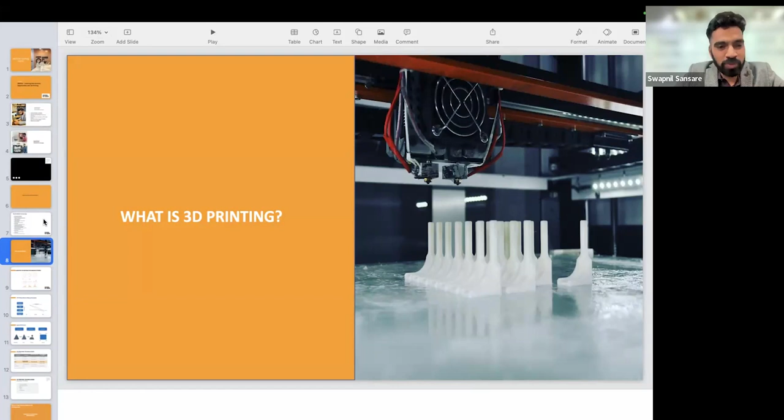So you all know what 3D printing is, I'm not going to go there. If you still want to know, you can quickly go to YouTube or Google and check that out. But however, 3D printing is a layer by layer process where you can add layers according to your part geometry, one layer at a time, and it can actually build a component.

So typically in manufacturing, you have three methods. One is your additive manufacturing, or 3D printing as we call it. Subtractive, wherein you have, say, a block of wood or metal, you machine it down and make your shape - so this is the component you want to make. And third is your formative manufacturing, also known as injection molding or molding, wherein you have a mold and then you pour in a material and form the shape.

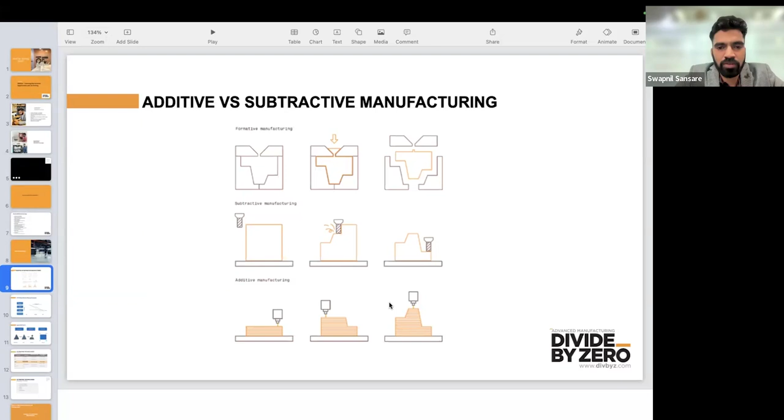So after that, the cost starts reducing because your initial cost is very, very high for the mold or for the tooling. Parallelly, when you look at subtractive or CNC machining also, for 1 or 2 parts, again your tooling cost is high, right? But with 3D printing, even if it's 1 component, 10 components, or 100 components, the cost remains the same. It doesn't change much.

Now, what happens is between, say, 0 or 1 to a few hundred components, 3D printing still has advantage over CNC machining and injection molding, especially when components are complex and have undercuts.

Okay, I definitely think many of you might have your own set of questions here in terms of how it works and how this is feasible. So that part is very important.

So typical AM process is your pre-processing, 3D printing, and post-processing. You all know this. However, there are different technologies - you have metal 3D printing, you have SLS, you have FDM, you have AFPM, which is one of our technologies that we have developed, similar to FFF, but it's an add-on.

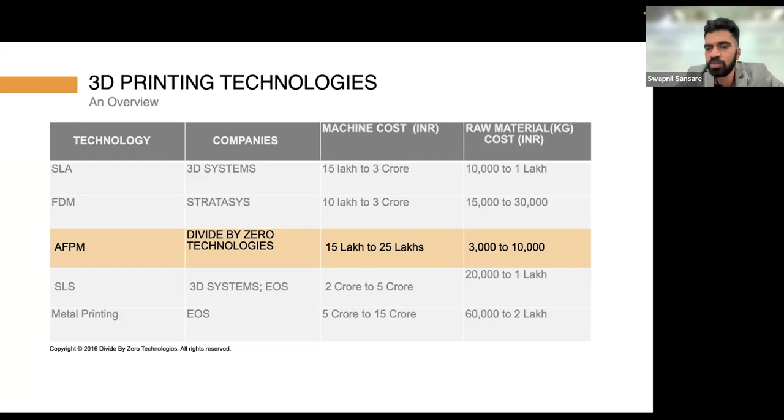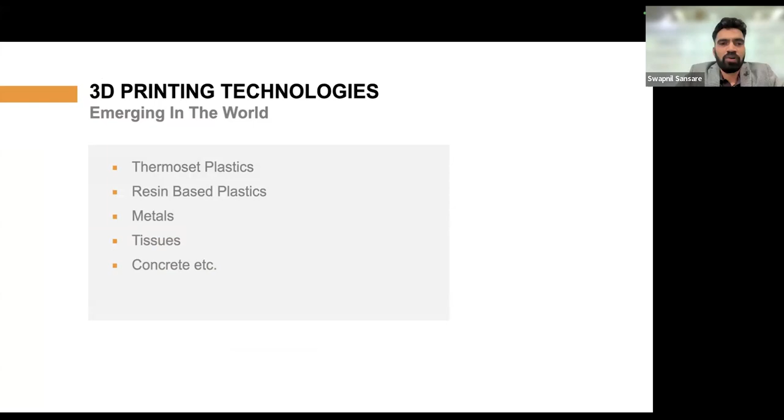And the cost ranges right from, say, maybe 50,000, 20,000 rupees, 15,000 rupees to, I think, a few crore rupees, and beyond that. There is this whole gamut of concrete 3D printing, tissue 3D printing, metal 3D printing, resin, or maybe plastics, polymers. Okay, and typically we're going to talk about polymer 3D printing right now.

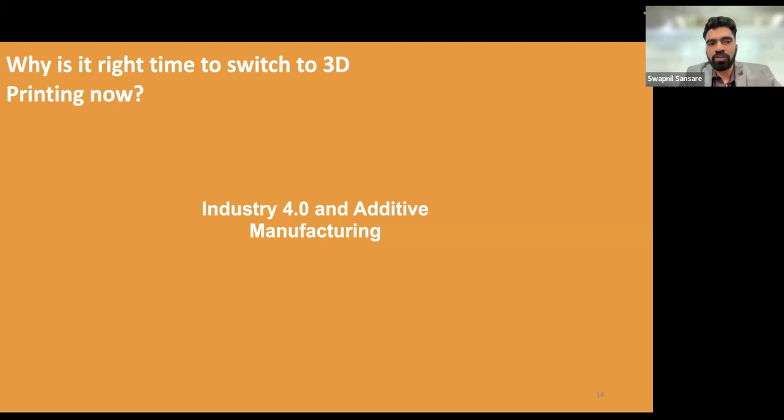So in this journey, why this is the right time to switch to 3D printing is because right now a lot of us are in the post-COVID world, facing this change of Industry 4.0 and additive manufacturing coming together. Everybody saw challenges in terms of what goes wrong if there is a supply chain disruption, and that has changed the game. A lot of things have changed, supply chains, assembly lines, robotic lines, but there are a lot of areas in industry that are still the same. Your investment casting process, mold making, pattern making process are still the same. That needs to change. If that can be accelerated, there is a huge gap in terms of business that you and me can actually handle.

As I said, in additive manufacturing there is tremendous growth right now. Especially it has moved from prototyping to application specific 3D printing. Earlier it used to be that they just want a sample. Now they want prototypes, end use components, tools, fixtures, molds. Many applications are there. I'm going to go a little faster.

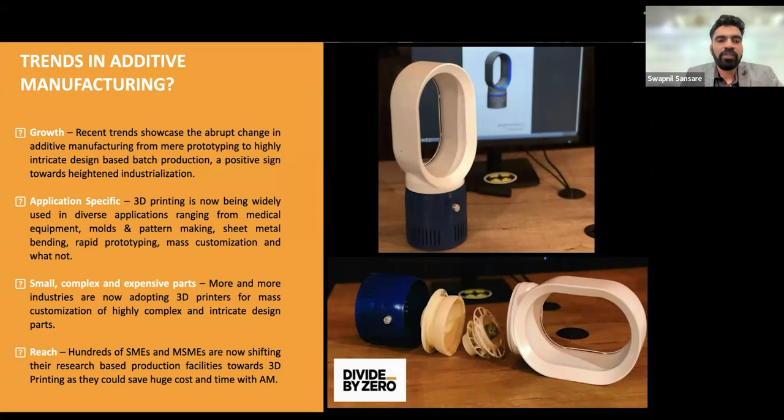Small and complex parts, expensive parts especially, if you have to ship them across continents, 3D printing is much easier an option. A German car manufacturer, if they have any old component to be replaced in India, instead of shipping it out, they can directly send a digital file to one of the 3D printing service bureaus in India. If it's a metal component, they can 3D print it, get it finished, and get it delivered in metal or polymer. Either way, it is possible.

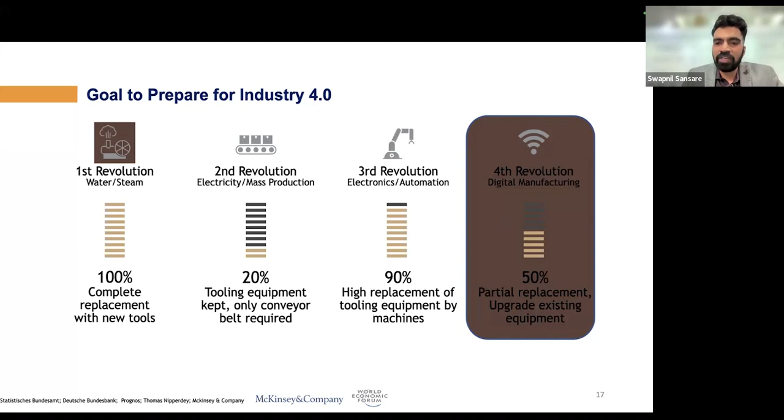Right now, like we've seen, the first revolution was with water and steam, a complete replacement with new tools. Second was tooling and equipment kept, only conveyor belt was there, so it was continuous manufacturing. Third was electronics, automation, robotics. And now the fourth industrial revolution is about digital manufacturing. Here everybody is looking at upgrading their equipment and pushing the limits.

But what is happening in this area is that right now we have AI, we have tools like ChatGPT, Claude, and so many, Google Gemini, and all those sort of tools coming in together. IoT is already there, data analytics is there, robotics and 3D printing is there. So with all of this together, the transformation of the $12 trillion manufacturing market is happening.

Right now, innovation is happening at very high speed. People want products in the market in very short time. So new products keep coming every month instead of every year. Companies want to keep less inventory, so they want inventory light models, and that's where 3D printing is a game changer, because whatever is required, we used to call it just in time manufacturing, but now with 3D printing you can run inventory-less models, better and more efficient supply chains.

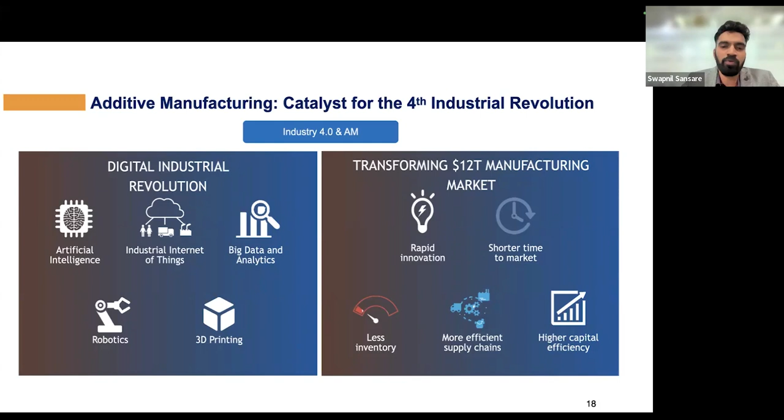What if you do not have to ship a component from one place to another, and rather you can just send a design file and 3D print it? I can have a head office in Delhi and I can 3D print this in China, Chennai, Hyderabad or Delhi, anywhere, with very high capital efficiency. With typical generic capital investments, the efficiency was very low, and with change of designs and tools, especially when it comes to molds and tooling, the efficiency was something at risk, because you never know when the next change is coming in, and the market might need that change.

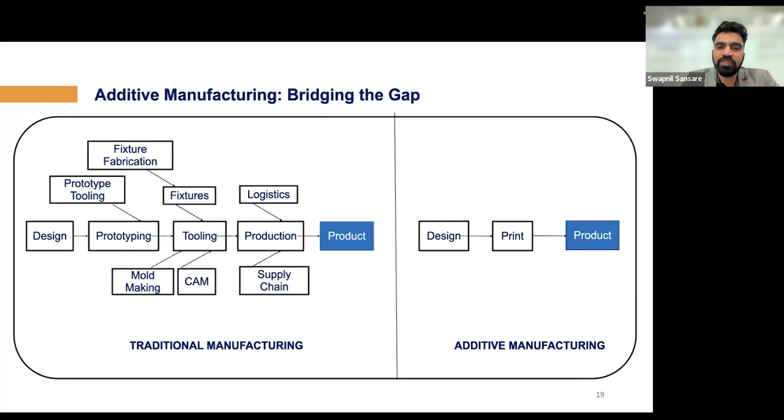So earlier in traditional manufacturing, you need a design, you were looking at prototyping and then tooling for prototyping, then have a small hand mold or maybe vertical mold to get that component made. Again you have tooling, then go to production, then logistics, supply chain, and then the product is delivered after so many processes. But with additive manufacturing, what is possible is you can design it, print it, and deliver it. Yes, there will be prototyping processes, but that can also be handled through the same method. And this is the beauty of the whole process.

Right now, in terms of additive manufacturing, there is a huge gap in what's happening in manufacturing. Manufacturing which was offshore is becoming local. Logistics was global, now they're just last mile. That means instead of delivering a component from, say, Germany to Chennai, I would just have a hub in Chennai where the company has their own print farm, and from there they can deliver it to the local customer. New product development was slow, and that is becoming extremely fast now.

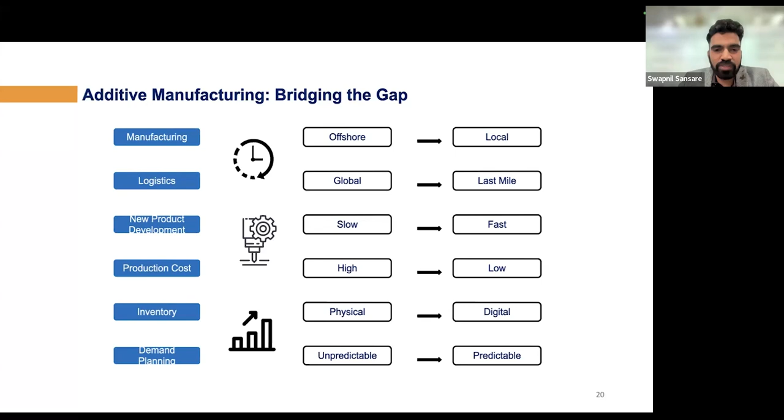Production cost has come down, especially when it comes to customized components. 3D printing still cannot compete with molding when it comes to high volume, mass manufacturing, for sure. Inventory has gone from physical to digital. I'll explain some of the examples now. Demand planning, which was unpredictable earlier, is completely predictable because you are actually manufacturing whatever is required, as much as required, and within timeline. So this is a complete game changer right now.

So which are the industries adopting additive manufacturing in a big way right now, especially in India, from where I see it. Military and defense is one area going big way in terms of 3D printing, trying a lot of options for 3D printing and post processing. In fact, having machines or prototypes that can actually withstand military grade specifications is possible now. They're also open to working with a lot of companies to develop this.

Aerospace engineering, yes, big way. Mobility and transportation, automobile industry has been a game changer. In fact, that's the industry that has accelerated 3D printing adoption in big waves. Healthcare, yes - orthotics, prosthetics, and even surgery planning. I'll show you some examples.

Consumer goods and electronics, yes, this industry is also moving towards personalization. A lot of changes are coming. Industrial services - when I say industrial and services, maintenance companies that are doing maintenance or supporting a lot of products which are obsolete. Big gap here. Agriculture, mining, and energy - these are three sectors. In fact, I know a lot of companies in India providing support to companies in UAE, US, Germany and Europe, most regions, for mining, energy, and agriculture components as well.

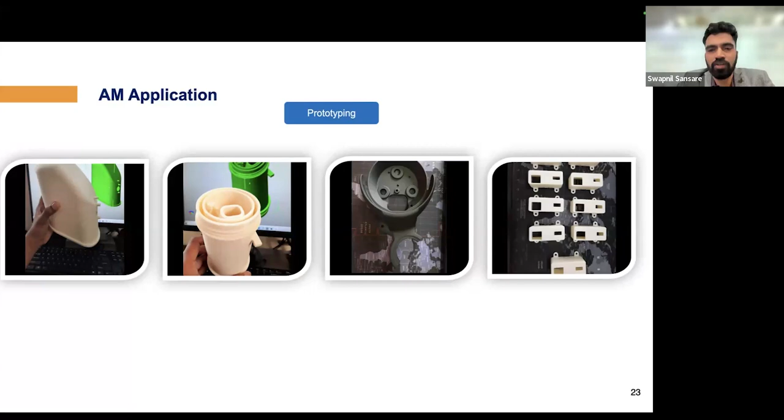A lot of automation is happening in this area. Drone is one more area which can be looked into. So when you say typical prototyping, yes, again you can look at standard options. Many of you already know this - from design to physical component, industrial applications in terms of possibilities.

So these are special applications, and whenever somebody asks me, Swapnil, where do I invest, or what is the area I should look into - there are so many options. I would say, first of all, look at where you are in terms of geography. What are the industries near you? Who are your contacts? And what is the skill set that you have? Based on this, you can always look into what area you want to choose, and that should be the area where you can get maximum impact.

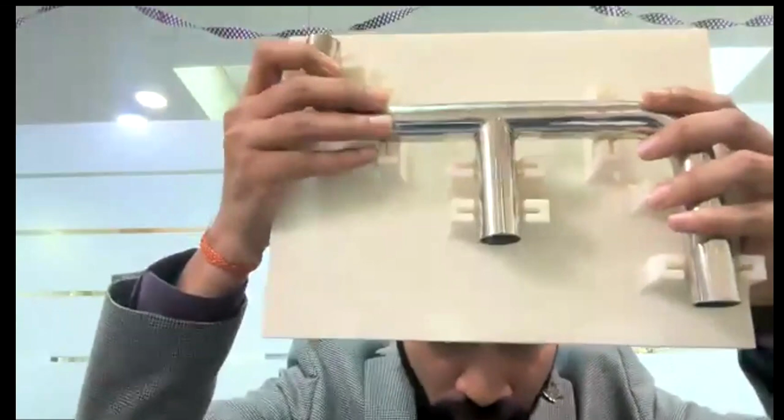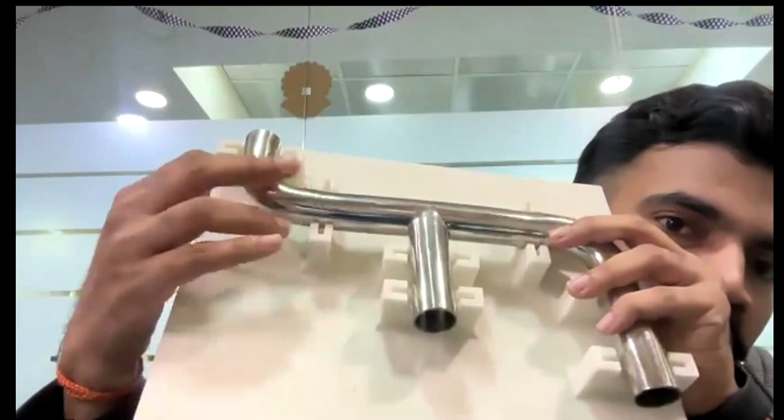This is one welding fixture wherein the component is this, and they put in different metal plates here. I've removed those plates because they'll fall off. This is a 3D printed fixture, but you can only have these 3D printed supports and have a flat metal or any other composite plate here that can work.

A lot of such fixtures in bulk. This is something we have built as an example, but in cases where we have provided a lot of such fixtures to our customers, this kind of goes, and we cannot show those examples here because of the NDA that we signed. However, this is an option.

Go-no-go gauges, inspection fixtures, forming tools. I'll show you some examples of digital inventory and tooling. When you say end of arm tooling, robots and a lot of grippers and areas.

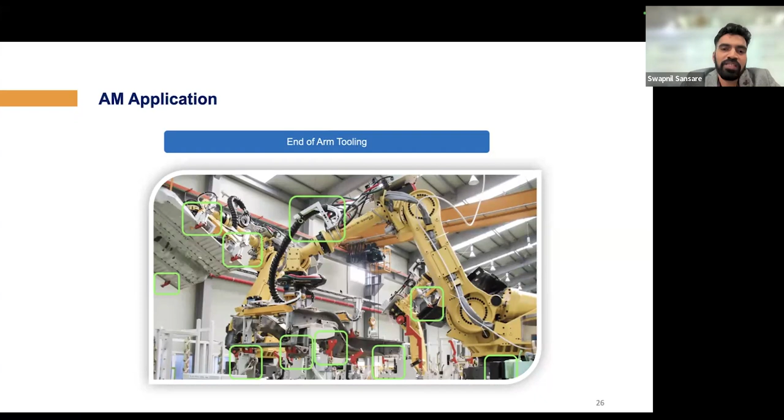If you know this area and understand it very well, a lot of components for every robot implementation, for every organization when they put in, even if it's a vehicle. Suppose if I'm putting up a robot for one particular brand and type of vehicle, if the vehicle model design changes, the grippers and end of arm tooling will change. So based on that, there's continuous need for such tooling. This is one area you should look for.

Jig fixtures in a big way, because assembly fixtures are required for all sorts of automobile or consumer appliance companies, and they are required in bulk. However, each fixture is required in only one or two quantities. Now, if you want to do this on a CNC machine or molding, it's not possible. It's going to be super expensive.

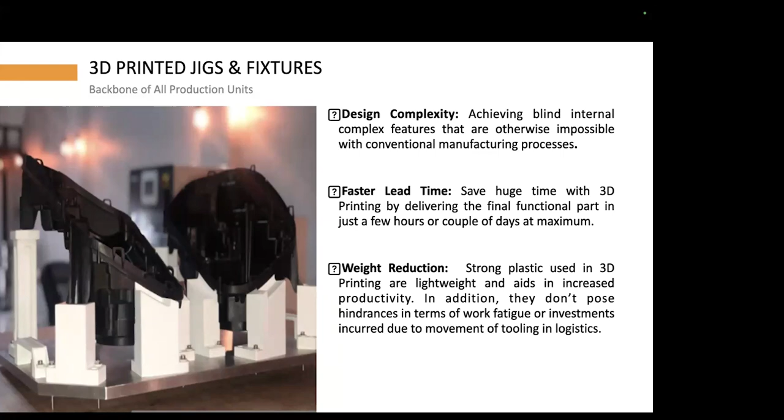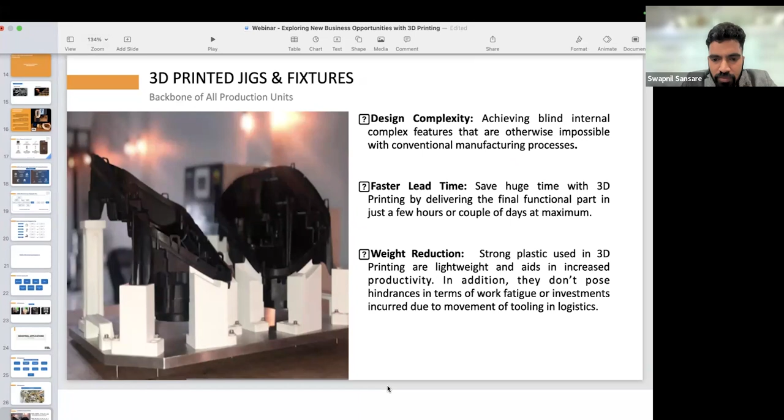However, with 3D printing, when they compare it with aluminum fixtures or any other fixtures, with all sorts of such fixtures, they can save a lot of money. More than 80 to 90% saving is there.

Only trouble here is how to design these fixtures, but for that as well we are coming up with a software solution now. So stay in touch with us, we will be sharing that news with you.

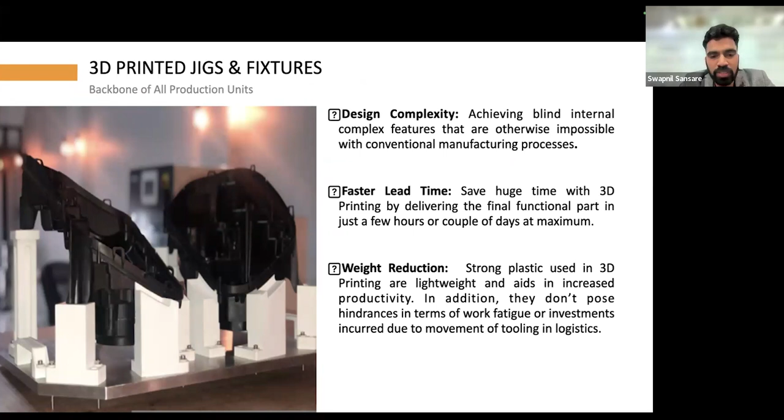Huge advantage here: sheet metal press brake tooling. This is again a tooling which can be done for trial and maybe 1000 or 2000 runs, up to 1.5mm of mild steel, aluminium, 1mm of mild steel, and 0.8mm stainless steel 316L. This can be used, good for small runs.

Do not try building this tool on your normal 3D printer. This tool might break and it can cause an accident. This was done with a lot of care, calculation in terms of tonnage, and this was developed in a polycarbonate material. If you have any questions, I'm going to go a little faster.

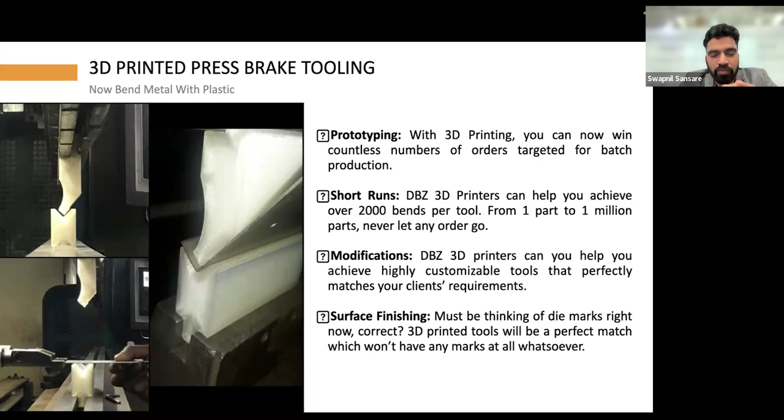Pulp packaging and fiber packaging solutions. In a big way you can make these molds and maybe even sample fiber packaging options, because when it comes to product designing, a lot of prototypes are available for the product, but for packaging prototyping, companies do not provide sampling, especially for fiber packaging and green packaging options. This is a huge gap, and you can actually cater to this gap and develop specialized services here.

A lot of you can approach all product design studios and tell them that you're doing this. This is going to be a game changer.

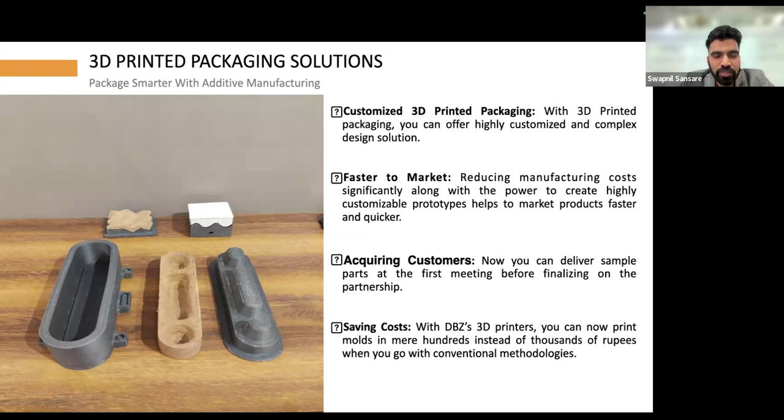One common thread here is, do not provide print service at a per cubic centimeter rate. Add more value to your 3D printing with design or your expertise, and sell that as something with more value together, and that will be a game changer for you. This is where you will excel.

Don't just do print services per cubic centimeter rate, because that is going to be a Xerox machine kind of scenario, wherein maybe today you're doing it for 10 or 15 rupees per cubic centimeter, and tomorrow somebody would come and sell it at 9 or 14. You don't want to be in that zone. Rather, have one expertise layer.

Also, you can build vacuum forming tools on a 3D printer.

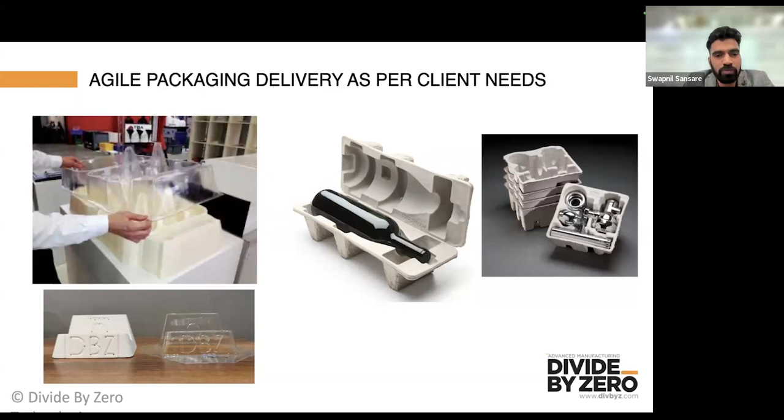PCPBT material can be printed for high temperature vacuum forming molds. As I said, pulp packaging molds can be done. Casting patterns, huge saving. We have done patterns right from very small investment casting patterns to patterns up to 1.5 meter tall.

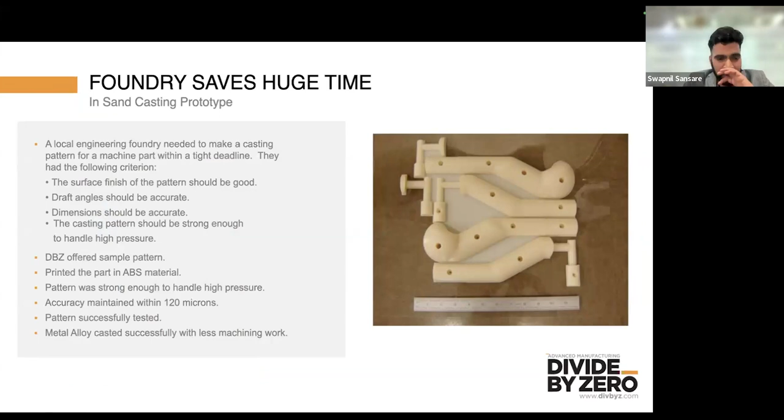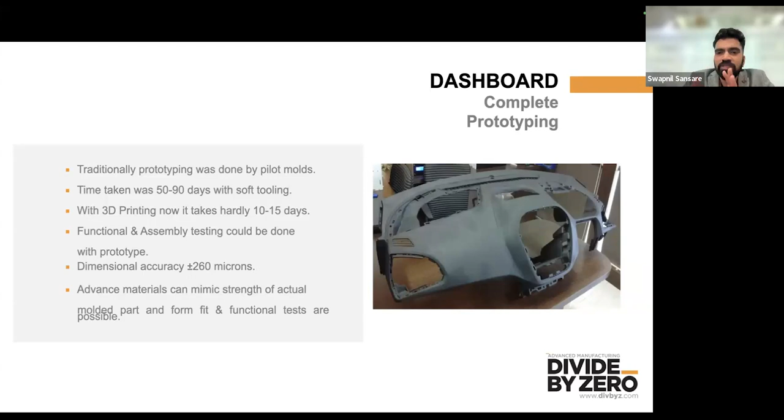Prototyping, yes, this is something that we did for Tata Tiago long back, and this is printed in 5 to 6 parts with dovetail joints. This was connected together. Art and architecture.

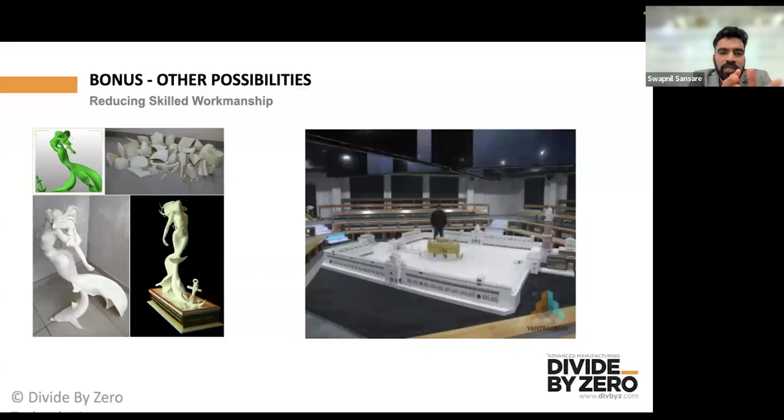How many of you are from art and architecture area? If you're there, I have one more case study I can show you. If not, then I'll just skip. But huge business. Unless and until you already know this area, unless and until you have connects in this area, do not get into this, because this also needs getting 3D files, converting them for 3D printing.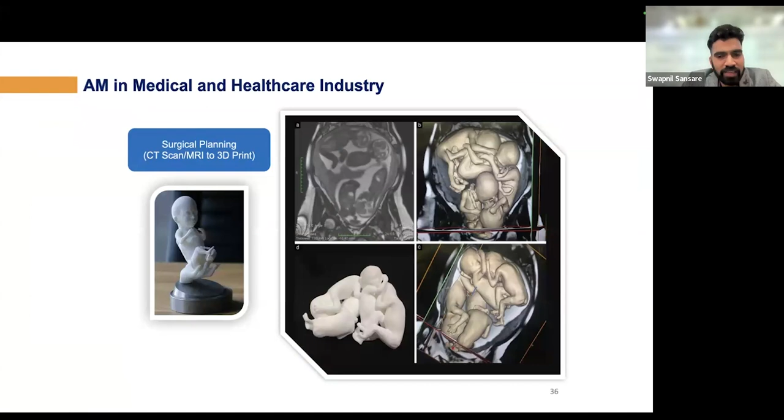We'll talk about that. Again, different areas. AM, healthcare industry, you can do surgical models, educational models, medical devices, tissue engineering, a lot of them together. And this is possible. Healthcare industry, big way you can do changes, prosthetics, and orthotics, a lot of different options.

So we spoke about aerospace, military and defense, mobility, transportation, healthcare, consumer appliance, industrial services, agriculture, and mining. However, healthcare tech is going to take lead for sure. Mobility in terms of tooling, especially tooling for automotive industry, is going to be something that you should be part of, because that's going to grow with 3D printing.

Learning, education, if you could create kits that can help students to learn certain topics better, that can work as educational aid. It can be for medical industry, engineering, physics, and then that can be given as programs to students, because now almost all sorts of colleges or institutes are running 3D printing programs.

And e-commerce is changing customer behavior. You can go to websites like Etsy and Amazon and search for 3D printed products, and you can still see a lot of components and products being sold there, which can be made in few bucks, but they're selling it in few thousands of dollars. So that is again a big market now, which is growing.

AM and EV and UAV is going to grow. Right now, EV industry is utilizing this for fixturing again, especially automotive. We have a lot of customers in EV industry.

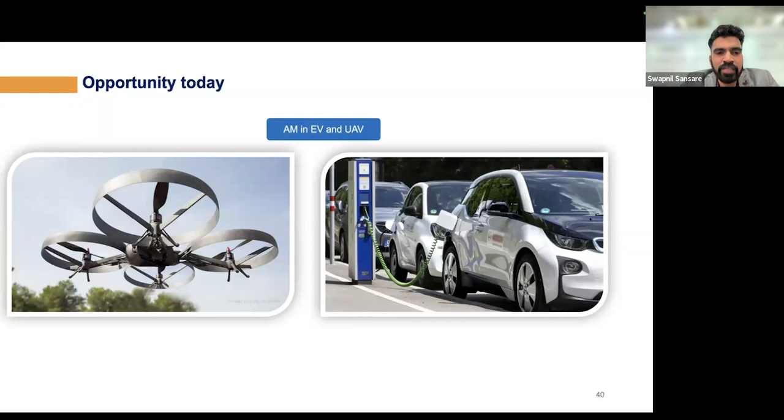Drone industry, a lot of small parts, especially look at custom companies that are building custom drones, agri-tech drones. Agri-tech drones are growing because they can solve the problem of fertilization, and all other areas automatically. And each drone is custom built, so that's where there is a big opportunity. Automotive components, I have one here in my hand, if I can show you.

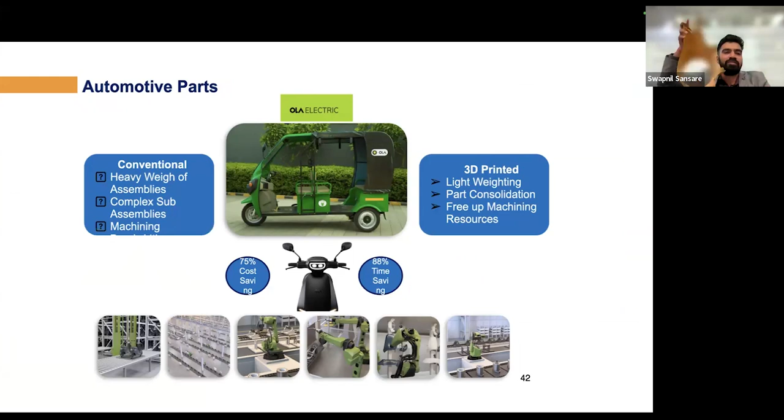Yeah, I don't know if this is visible, but this is something which is kind of 3D printed and built. They need it constantly, and it's possible.

But what went wrong with 3D printing, or what goes wrong usually? Typically, many of you must have witnessed this: strength issues, part cracking issues. A lot of times material absorbs moisture. You have temperature resistance issues. Customer says, I want component that can withstand engine temperature. Sometimes in fixtures, they say we need ESD static safe material, or elasticity, or flexible material, something like this. And abrasion resistance or cost is an issue.

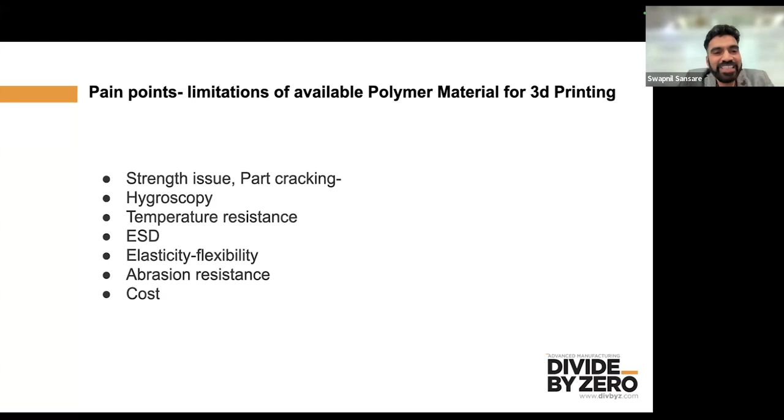So we also discussed that we'll talk about material and how material selection can be done. Typical strength issues or part cracking issues, you can look at material like polycarbonate or PACF or PETGCF. If you want something which is cost effective, you should go for PETCF, not PETGCF. PETGCF has lower glass transition temperature. PETCF is a little better, but either works really well. PACF, which is nylon and carbon fiber composite, or best, I think, is going to be polycarbonate.

Basic material that you use has 41 MPa kind of tensile strength, ASTM D638 method. Best would be PC, which you can look at.

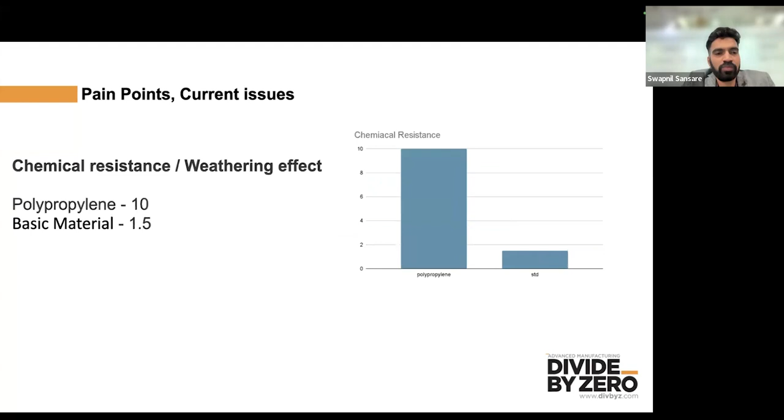PA-CF and PETG-CF. In terms of chemical resistance and weathering, many of you come to us and say you want components that can withstand weathering, UV, or sunlight. For that you can use ASA or PP. PP is a little expensive, but ASA can be used - it's similar to ABS but has a lot of advantages, and it can be 3D printed.

For temperature resistance, a lot of companies come to us saying they have never seen a material that is affordable and has good temperature resistance. I'd recommend PC-PBT, which has good temperature resistance. Even though the spec says 160, we have tested this up to 175 degrees. Basic ABS can give you up to 95 on record, but I think it starts softening beyond 88 to 90 degrees.

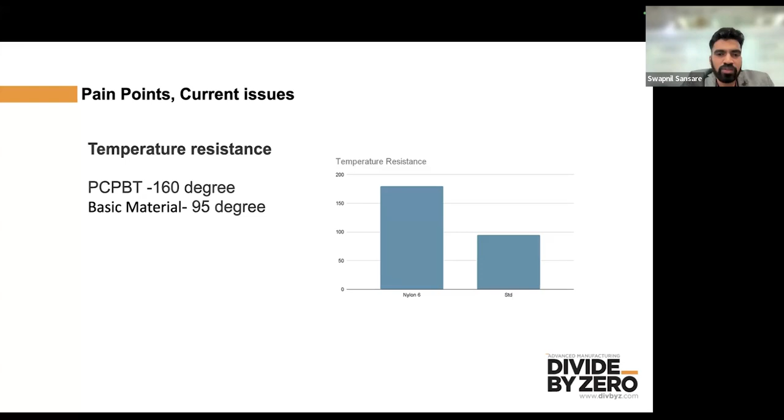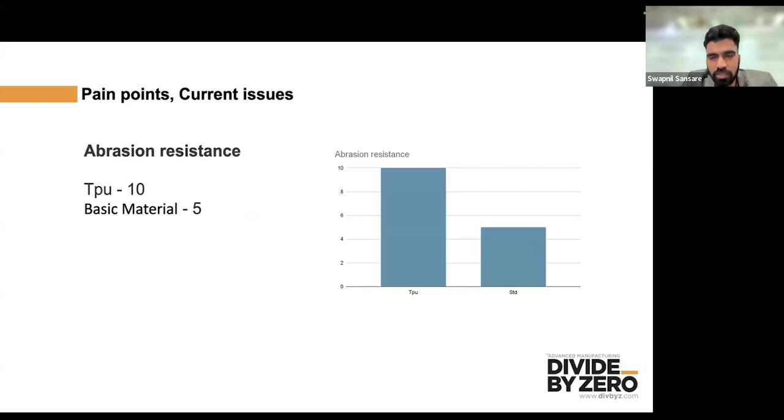You can also look at nylon 6 as an option, but the problem with nylon 6 is it's super expensive, even from an FFF machine point of view. For abrasion resistance, look at TPU or TPE, or PP; nylon 11 is also an option. For flexibility and elongation, again PP, TPU, nylon. For ESD, three materials: nylon, TPU, PC. All this information is in our material selection guide.

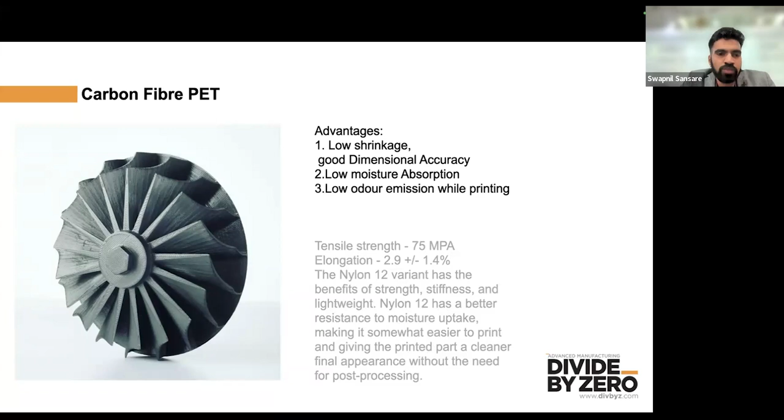When you want a hero material with advantages in strength, flexibility, weathering, and affordability, I'd say look at carbon fiber based PET composite. Amazing material - this is something you should be shifting onto. You can also develop a lot of components with this into end-use applications.

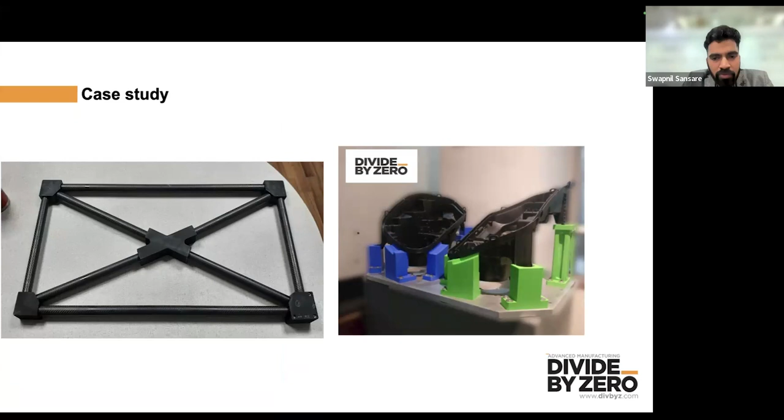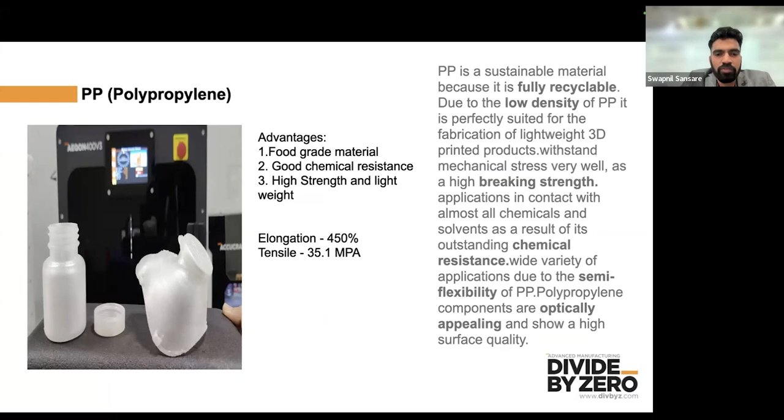All the information about how to use the parameters is in our material selection guide that we'll be providing you. You can build fixtures with this - we've done a lot of different fixtures. PP again is possible; it can be 3D printed, a little difficult to set up parameters initially, but once set it runs very well. This material is a game changer. Nylon 6 is there, polyurethane is there.

With TPU, we've done another case study in small batch manufacturing, where a gym equipment manufacturer got an order of around 50 to 100 units per quarter, and getting polyurethane components molded for just 50 to 100 units was super difficult for them. We could 3D print and help them build this at almost 1/10th of the cost, because mold cost was really high for them and their customer wasn't committing quantities. So end-use applications like this are possible.

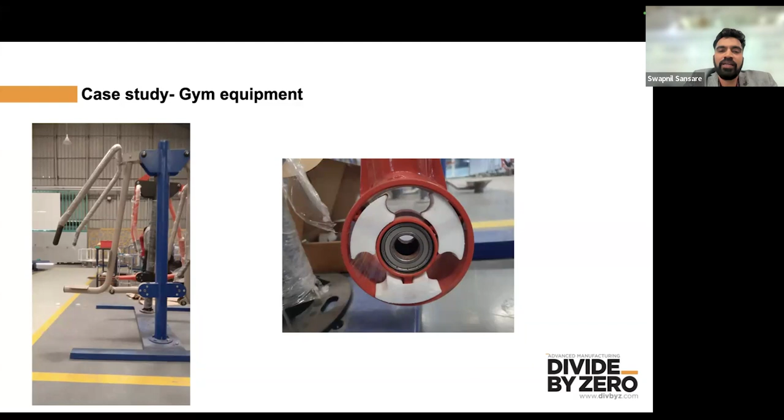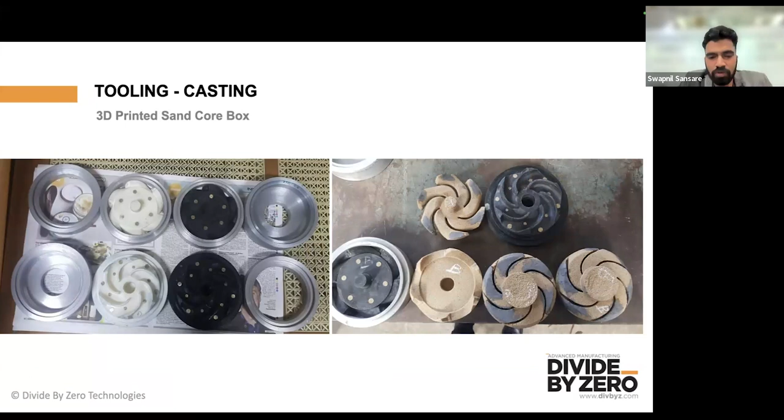However, for end-use applications you need the right material selection and right parameter selection, and that's where we come into picture - we help you out. We spoke about polycarbonate, about packaging tooling, and you can also do sand core boxes. If anyone wants to understand, park your questions and I'll answer them.

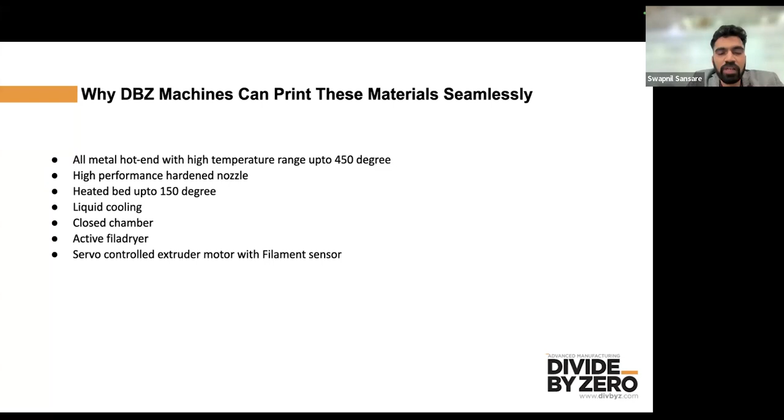We have developed certain machines with high flow, all-metal hot ends which can withstand temperatures up to 450. Hardened nozzles, bed can go up to 150 degrees. Liquid cooled heads, closed chambers. We have active filament dry systems, and most importantly, servo controlled extruders with filament sensors.

But what is it - I've shown you so many options. Where are the real examples? Who is doing this? A lot of times people come to me and say, Swapnil, you've talked a lot, but where is it, who is selling it, show us. So let me show you some examples.

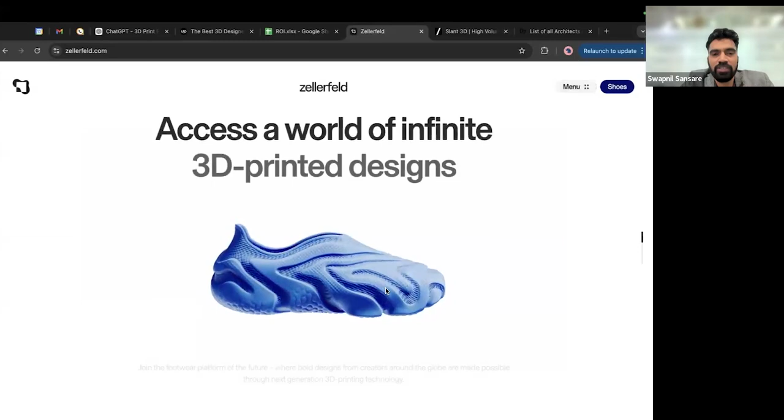This company called Zellerfeld is doing wonders. They were on the cover page of Time magazine. They're using FDM 3D printers to build custom shoes. They have definitely customized their machines. I know the team and I've observed them from a distance for so many years now.

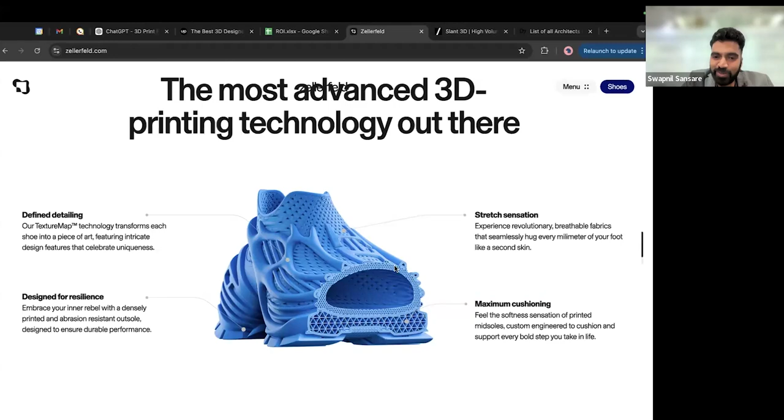What you can do is secure your slot, pay some money to reserve it, scan your feet using their software on the phone, and then get a 3D printed shoe. This is an FDM 3D printed shoe - you can see it here. We can discuss this more one-on-one.

Almost 10, 15, 20 times margin. Definitely they have put in a lot of effort to build this, design it, and develop a lot of software, but this is where it is moving to.

Now, second example I have is a company called Slant 3D. They have put in thousands of 3D printers, and they say we do mass production without molds. They claim that they are one of the largest print farms in the United States. These guys have developed everything, from small requirements to large requirements, print on demand. They have created an API that can be integrated into any software, and these are their customers.

This company actually gets all the components 3D printed, and they have developed 3D printed robots that can compete with industrial robots in accuracy and repeatability. They have given all the test results. You can go to this website and check.

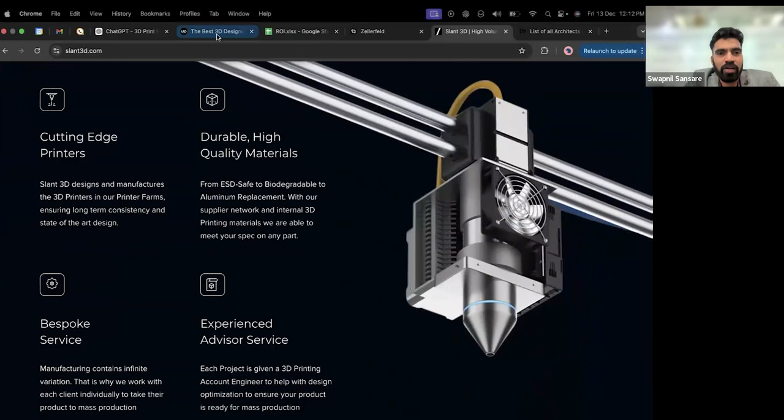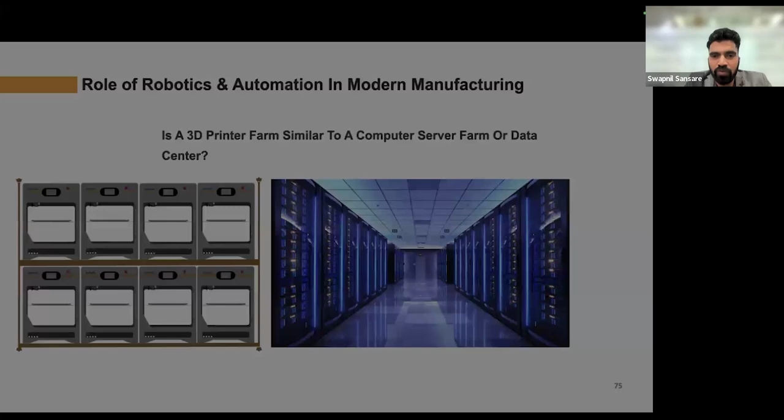Okay, but this is more into art side again. But if you are looking at that kind of application, this is something which you should look at.